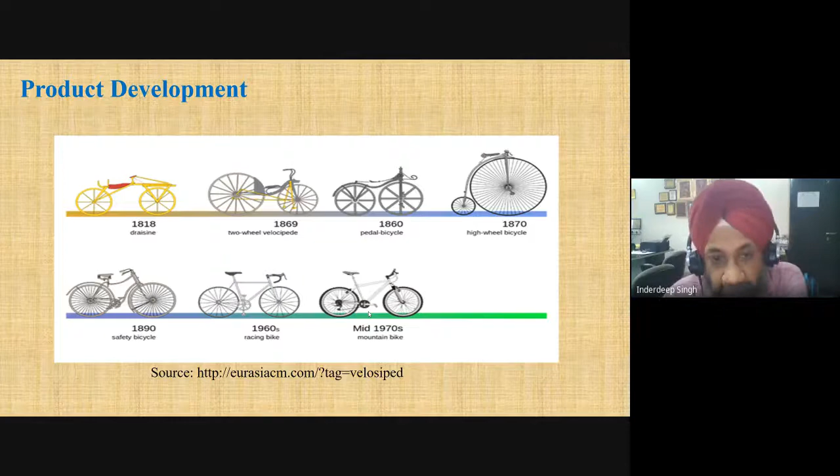This emphasizes the point that if you want to be a designer, you can never stop. There is no product which we can call the final design. Always there is scope for improvement - scope to increase safety aspects, improve functional aspects, increase reliability. There are different aspects on which the proposed design and current design can be compared.

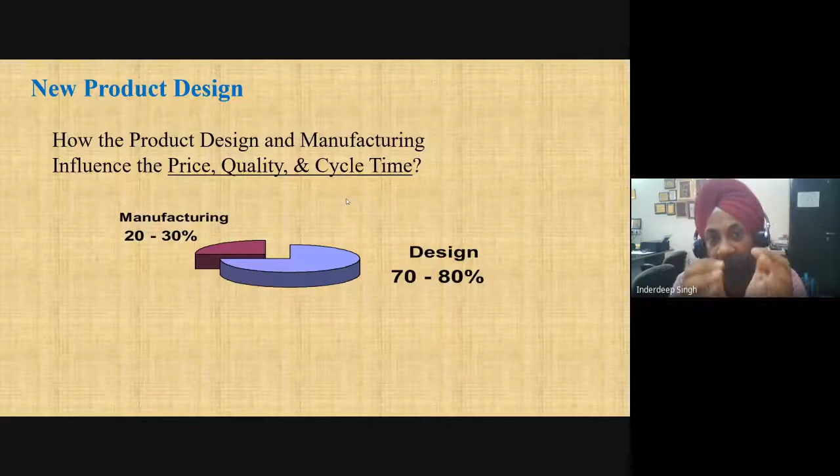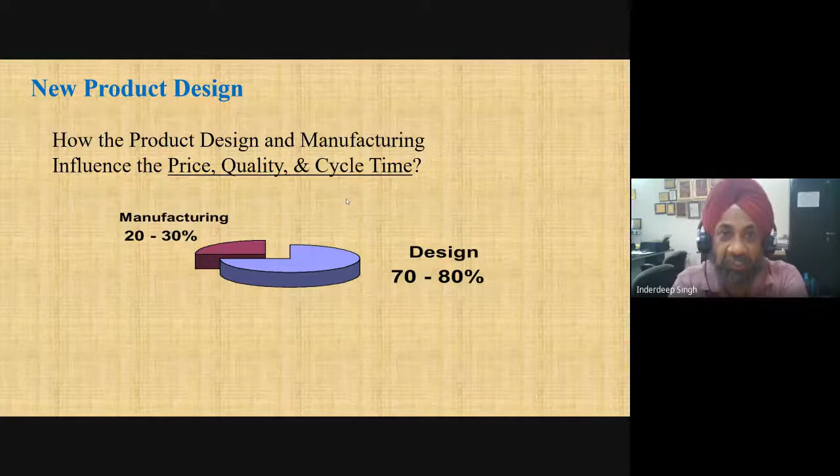This semester I am taking a course on design for manufacturability. In this course, we design the product keeping all the manufacturing constraints or guidelines in mind, so that when the product goes into manufacturing, all factors affecting manufacturing have been taken care of during the design stage itself. This makes manufacturing easier, and easier to produce that product.

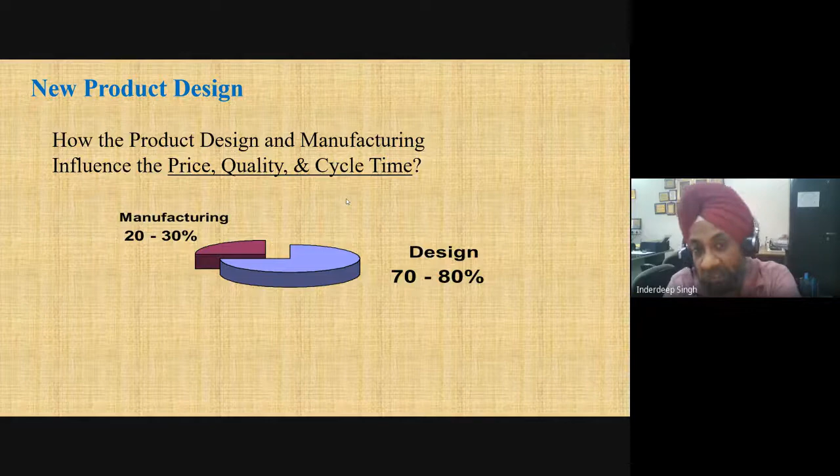Manufacturing can only control 20 to 30% of the cost of the product, whereas 70 to 80% of the cost, quality and cycle time is locked during the design stage itself. Therefore design becomes an important part of any product development project.

Now coming on to value engineering. Since my topic is product design using value engineering, I've touched on product design in about 10 to 15 minutes. Now for another 40-45 minutes I will talk about value engineering, and finally we will have a question and answer session - I am not very sure whether I will be able to answer, but at least we will have a question round.

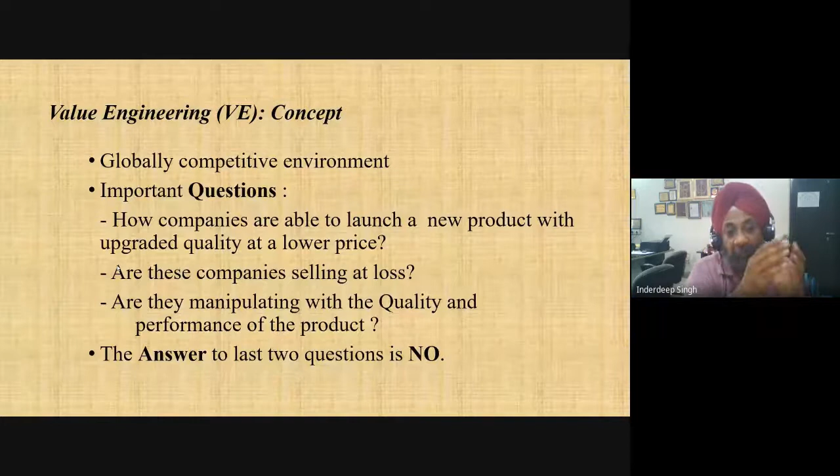So for the products which we normally use, suppose I am using headphones - there are a number of headphone companies which may be producing them. So which one I will buy will depend upon the quality, performance, reliability, cost. There will be different parameters of value which will help me make this decision. Globally there is a very competitive environment. So once we are designing a product, we have to see whether it will be able to meet or exceed the requirements of the customer, as well as exceed the competition already existing, or the products already being used by the customers.

So what are the important questions we have to answer to understand the concept of value engineering? First question: how are companies able to launch a new product with upgraded quality at a lower price? If you see, especially in the electronics segment, companies are coming up with new products - the quality is better, the performance is better, the life is better, the reliability is more, but still the price is normally the same or it may be low. Are these companies selling at a loss? No company will make a product and start selling it at a loss. So are they manipulating with the quality or performance of the product?

They may not be manipulating with the quality. So the answer to the question - are these companies selling at a loss? The answer is no. Are they manipulating with the quality and performance of the product? Again, the answer is no. So without manipulating the quality or performance of the product, and still making some profit, how can companies come up with new products? That is the basic concept of value engineering.

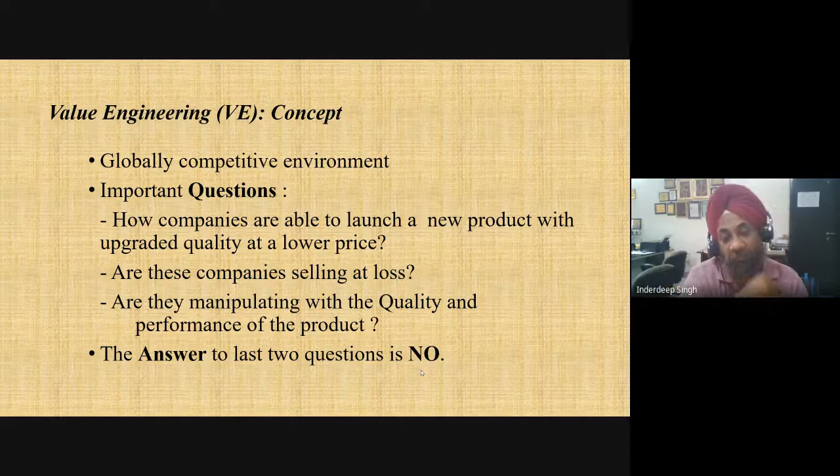That led to the development of this branch - why is it not possible that we come up with alternate materials, alternate processes, alternate designs of the product, so that we are able to provide the desired function for which the product has to be designed, at a reliable design and a lower cost.

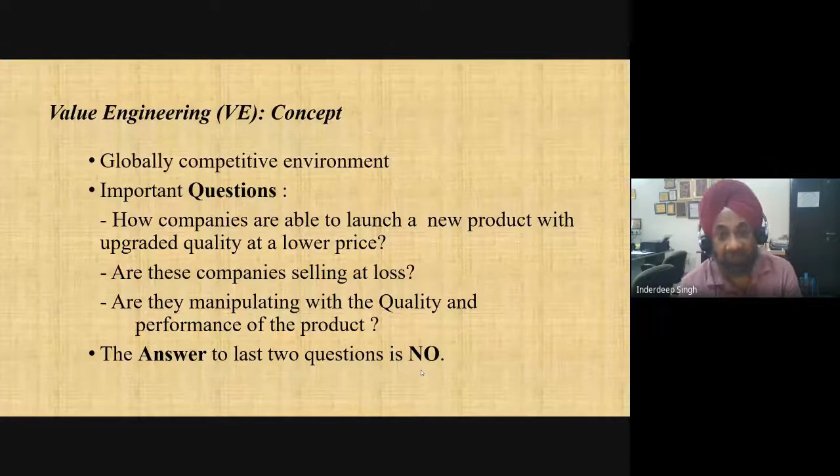So the reliability of the product, performance of the product, quality of the product, maintenance of the product is not compromised, but still you are able to develop the product at a minimum cost. With that concept, this value engineering concept was developed.

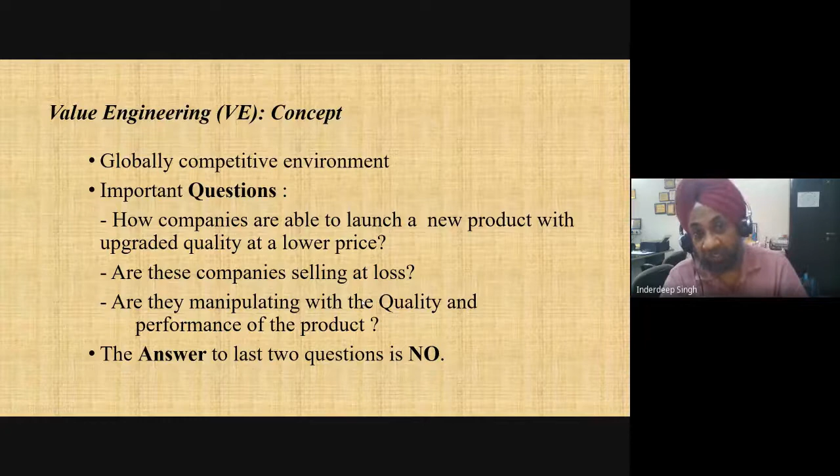So companies are not selling at a loss, they are not compromising with quality and performance of the product, but still they are able to launch a new product at a lower price. Why? Because they are working on alternate materials, alternate processes, and alternate designs of the product. So this is the basic summary.

In 1947, the Vice President of General Electric, Harry Erlicker, observed the occurrence of an unusual phenomenon. This unusual phenomenon, which I have already explained, had been appearing throughout the industry, and it led to the development of value engineering.

That unusual phenomenon was a new thought process related to change in materials, change in process, change in design, and then coming up with a better design - one that is light in weight, better in terms of maintenance, better in terms of comfort, safe, and giving you the desired function without compromising on the quality of performance.

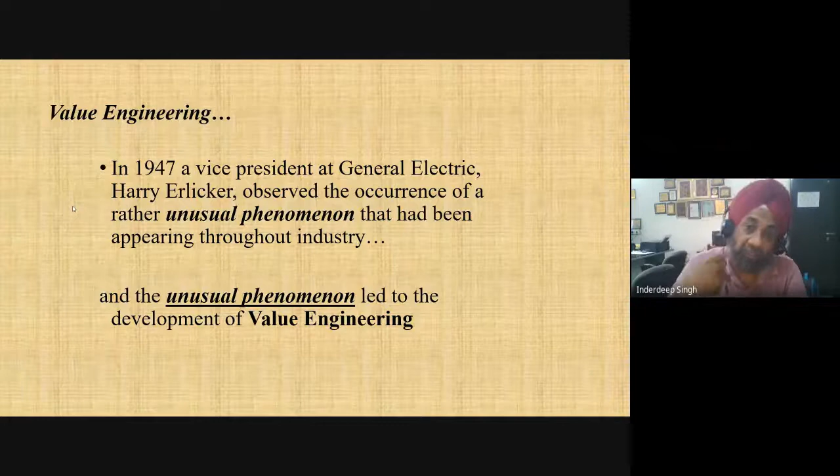So why can't every product be redesigned by thinking in these terms - what can be the other method of doing the same work, if this product is not available with me? For example, I am using this computer mouse. If the mouse is not available, I don't want to use the mouse - what can be the other product which can help me achieve the same function which I am achieving with this mouse?

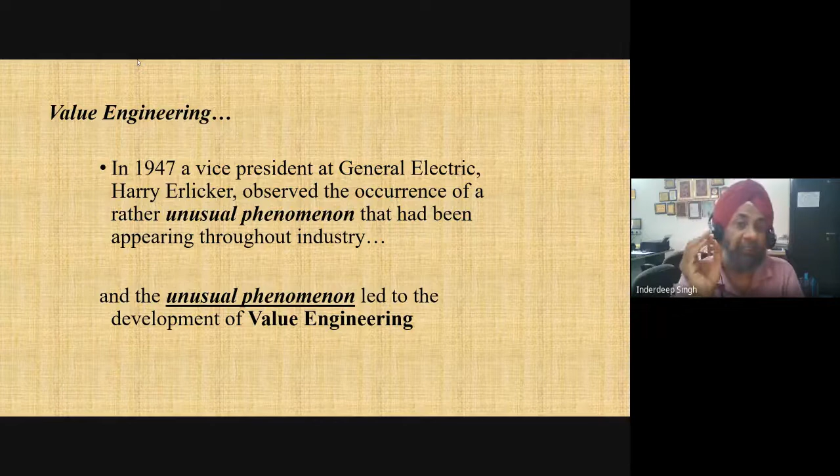That led to a completely new thought process, of how products have to be analyzed keeping in mind the term value. Now, how is value defined? We will see in the subsequent slide. Value is use versus esteem value.

Now the use value for this computer mouse, or this bottle which is now empty - maybe it is a sanitizer bottle - the use value is that it must be able to dispense the sanitizer as and when required without any problem. But the esteem function is how it looks, what is the shape, what is the color of this bottle, can the pump be given a different shape or a different color. That is the esteem value.

So normally every product will have a use value as well as an esteem value, and as a product designer I will have to take a decision on how much of the use value must be there in the product and how much of esteem value may be there in the product.

For example, the tie clip example is shown on your slide. The tie clip holds the tie and keeps it out of soup - if you are having your soup, the tie clip will hold the tie in place and not allow it to go inside the soup. You may buy a tie clip for rupees 10, or even rupees 10,000, or for that matter rupees 100,000, because you may have a diamond-studded tie clip. The diamond-studded tie clip may be very costly, but the use function is being achieved by the 10 rupee tie clip also and the 10,000 rupee tie clip also.

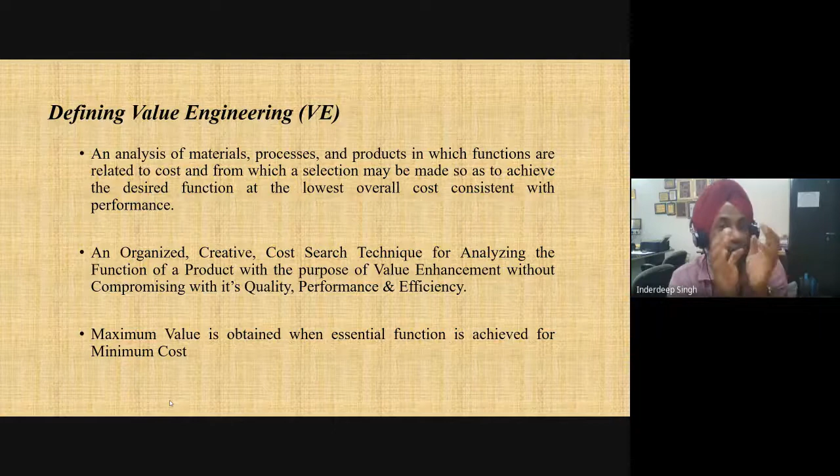An important point to note - I know those listening carefully, n number of questions may be crossing their mind. For example, the wristwatch. There are n number of companies manufacturing wristwatches. Now you may get a wristwatch for rupees 150 or 200, or you may buy a wristwatch running into lakhs of rupees. For both, the desired function is to show time. So the desired function is met reliably by a 150 rupees watch also.

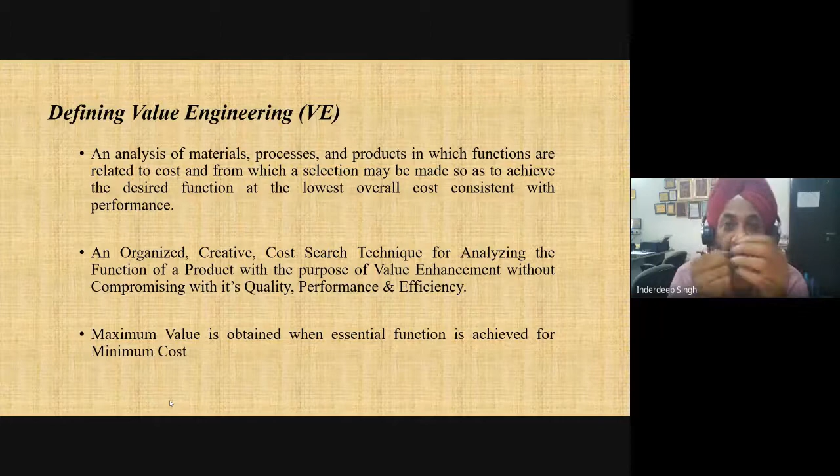Reliably is very important. It must not happen that you want to buy a watch to use for 3 years and it only shows you the time for 3 months, and after that there is a problem - technically you have to take it again to a shopkeeper and then maybe he will try to see how to repair it.

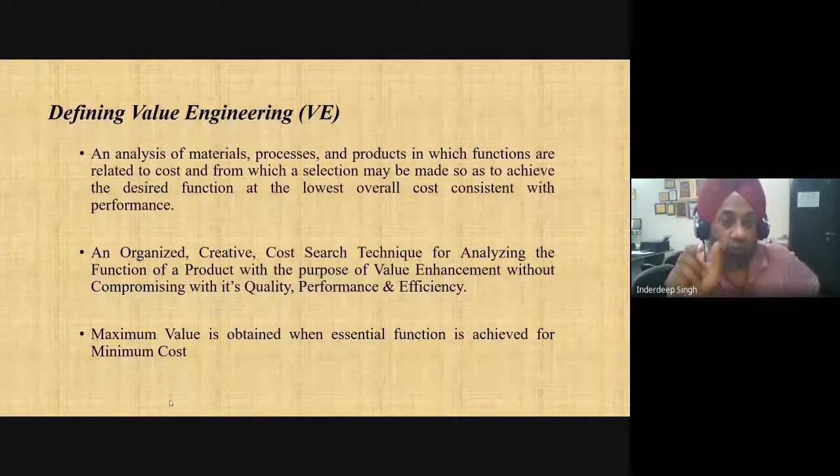So it is not performing the desired function reliably. So what does that mean? That means maximum value is obtained when the essential function, to show time, is achieved for the minimum cost. So if your specifications are that for 3 years this product should deliver, that should not be compromised. For that 3 year lock-in period, you will compare 4 or 5 different products, and whichever gives you the essential function at the minimum cost without compromising quality, performance or reliability, that product you are going to choose as per the cardinal or basic principle of value engineering.

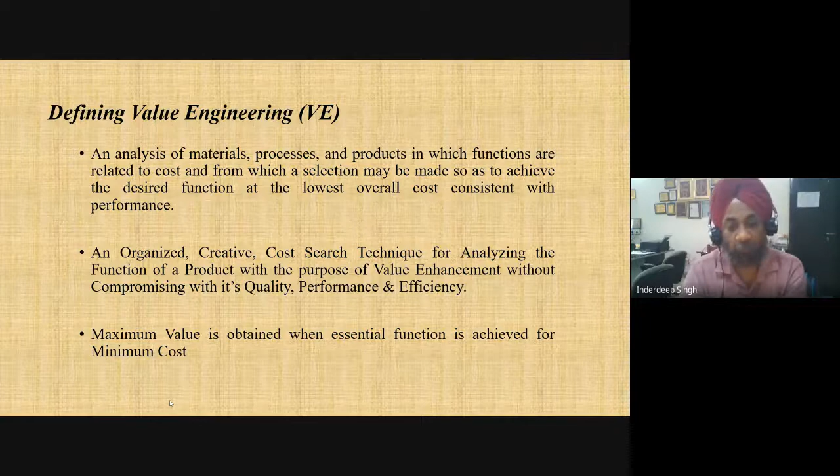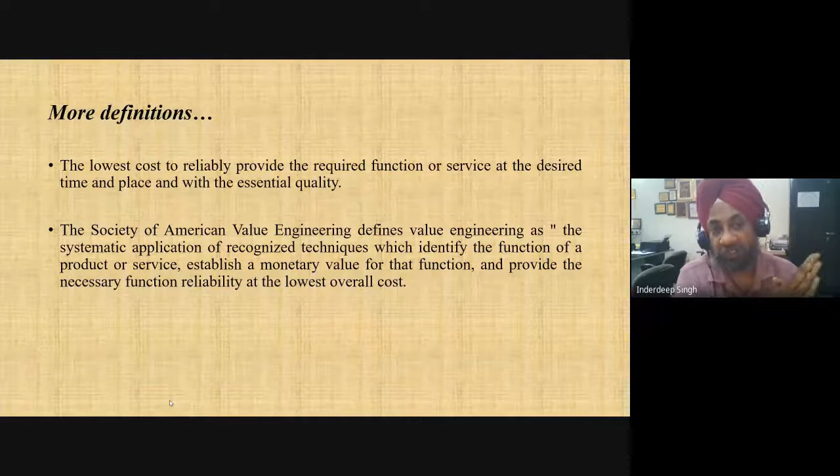There are other definitions also, so I will read and try to explain another one. The Society of American Value Engineers, normally called SAVE, defines value engineering as the systematic application of recognized techniques which identify the function of a product or service. So again the word function is coming, and therefore I spent some time explaining the word function.

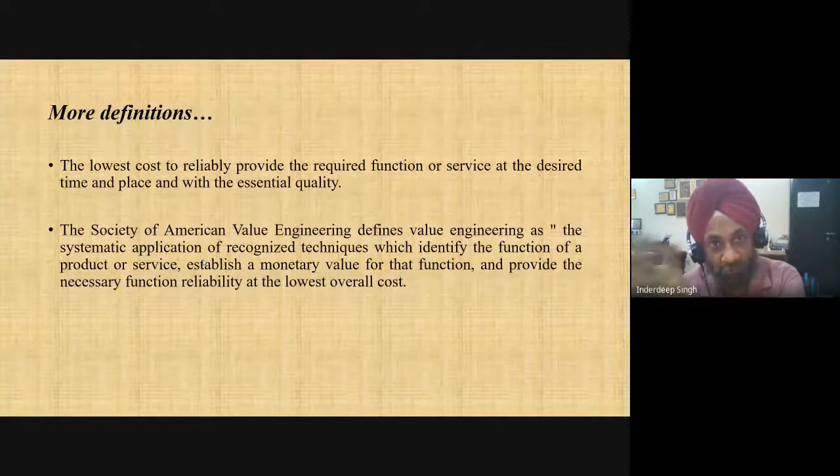So these are a systematic approach. It is not a philosophy, it is a systematic technique where scientifically there are templates available. If you buy a good book on value engineering, towards the end you will get a template that shows how to record the information step by step, and how to solve the problem. So it's the systematic application of recognized techniques.

There are 20 techniques of value engineering. Some of them are behavioral in aspect, some are technical, some are financial. So there are 20 different techniques of value engineering which help you solve any problem, keeping in mind the principles of value engineering.

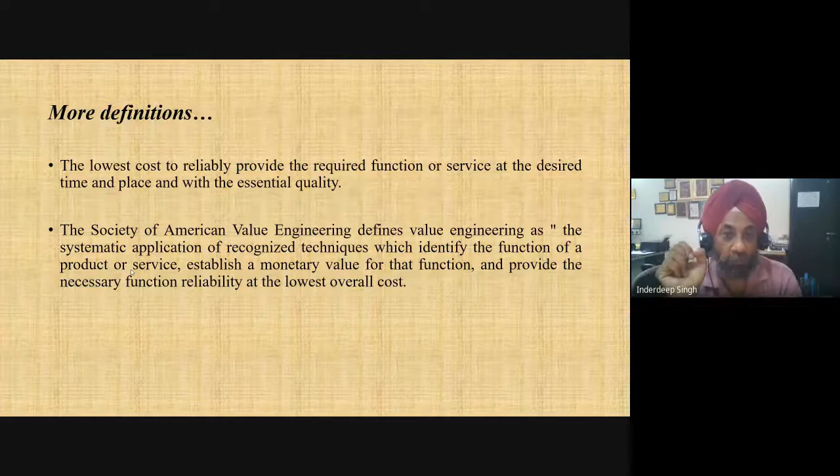So value engineering is the systematic application of recognized techniques which identify the function of a product. How will you identify the function of a product? By asking questions like how and why, and establish a monetary value for that function. So for example, for a watch, which is only for showing the time, a monetary value will be assigned to this function.

What is the monetary value associated with this? What is the minimum money a customer must spend in order to get this function of a watch on his hand or on his wrist?

Which identify the function of a product or service, establish a monetary value for that function, and then try to provide that necessary function. A very important word in the definition is 'reliably' - not reliability, reliably - at the lowest overall cost. So the desired function has to be provided reliably at the lowest possible cost after you subject the product design to the value engineering principles.

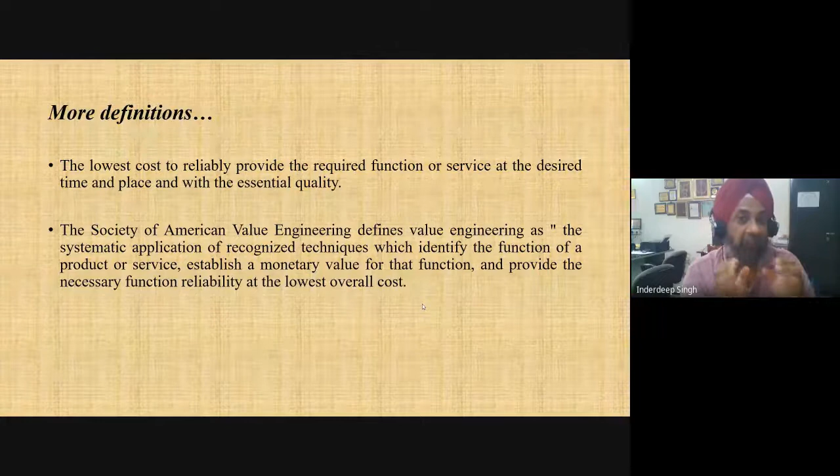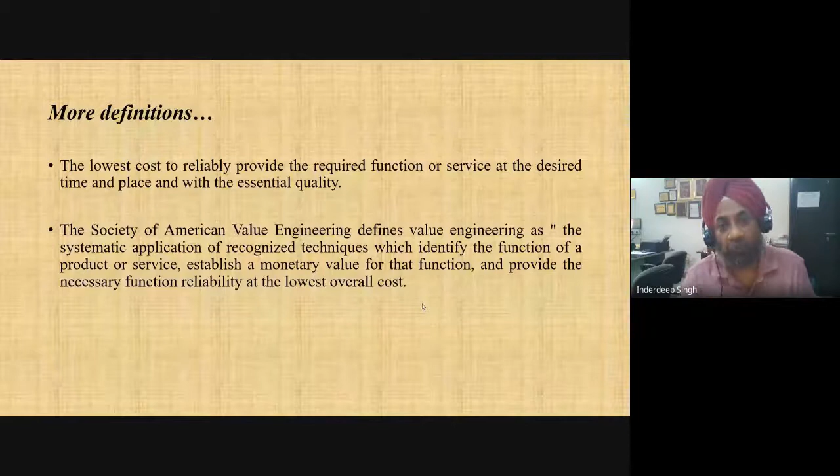So from a value engineering point of view, a designer will try to achieve the target that the product has been designed to satisfy this particular function, and this function must be provided to the customer reliably but at the minimum possible cost. Now let us take an example of a hypothetical bolt.

Normally in class I ask this question to students and ask them to think over it for some time. This is an example of a hypothetical bolt that holds the wing on a transport airplane. Suppose there are hundreds of rivets fixing the wing to the main body of the plane, but we imagine there is one bolt fixing the wing of the aircraft to the main body.

Now the question is, suppose this airplane is carrying passengers and the bolt fails midway in the air. What is the value of this bolt? You can think over it. We have seen the basic definition of value engineering. We know what is value, what is function, what is cost.

Now suppose the bolt fails mid-air. What is the value of the bolt? Many of us will answer that the value of the bolt will be equal to the lives of the passengers that will be lost, but that is not the right answer. From the basic definition of value engineering, we have to understand the desired function of the bolt - to hold the wing to the main body, or to assemble the wing to the main body.

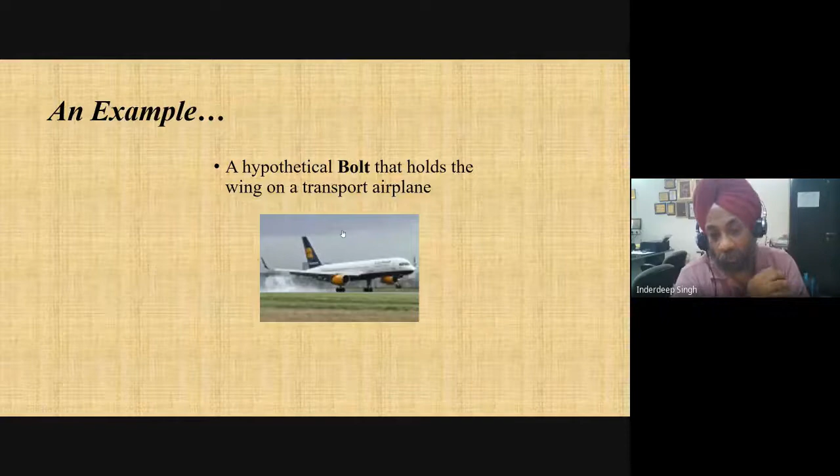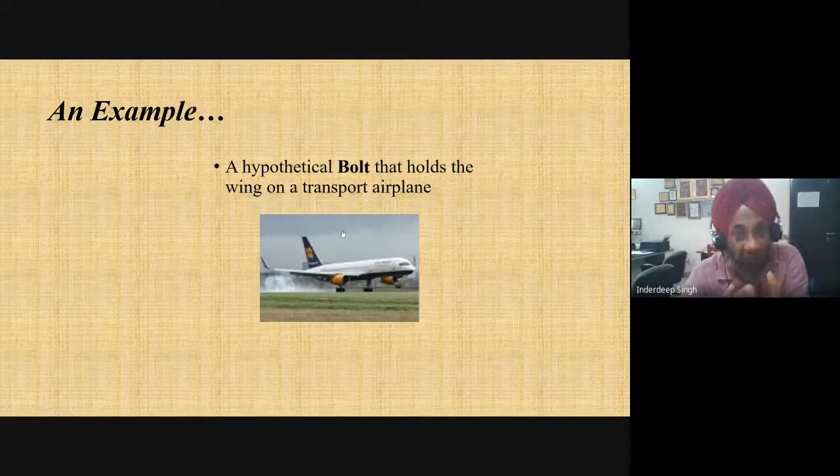But finally, I will buy whichever one is satisfying my requirement in terms of color, size, smell, whatever I want to judge, but at a minimum possible cost. So that is the basic concept we must apply in all designs that we normally do. So in value engineering, if applied to the product design, the design that we come out with will definitely be cost efficient. So the cost has already been integrated into the product design.

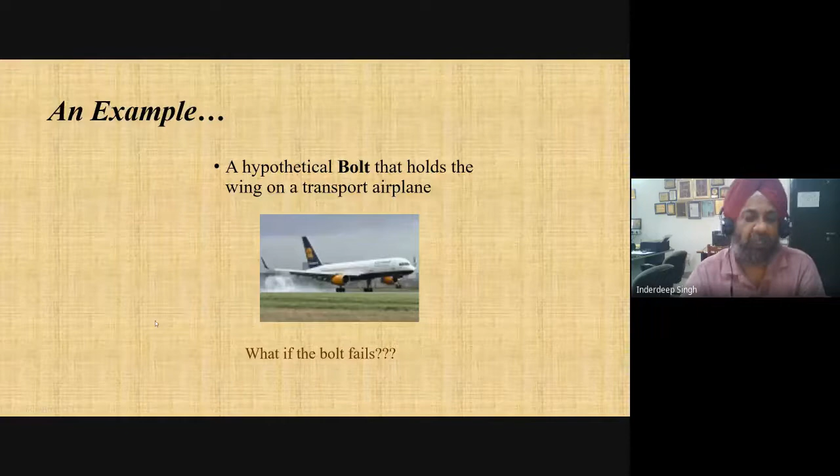Now this is the question which I have already asked you on the screen: what if the bolt fails? The answer is that the bolt has a zero value if it fails.

These type of projectors are not used these days, but still we can see that if we analyze the product by breaking it down, normally one of the techniques of value engineering is blast, create and refine. Blast means if it's a bigger product, you bring it down into its different parts and components which have been assembled together to make the larger or complete product. So you break down, blast it into individual components.

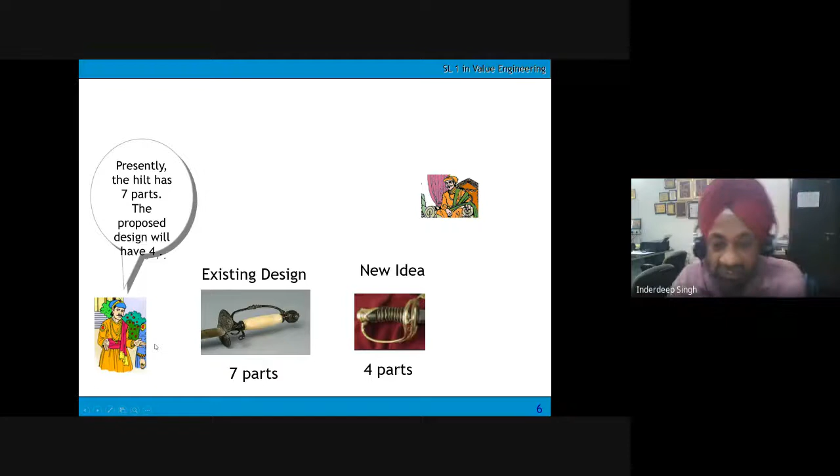This is the new idea. So maybe you may not be able to appreciate the reduction in the number of parts, but at least we can appreciate the idea that one of the... just a minute.

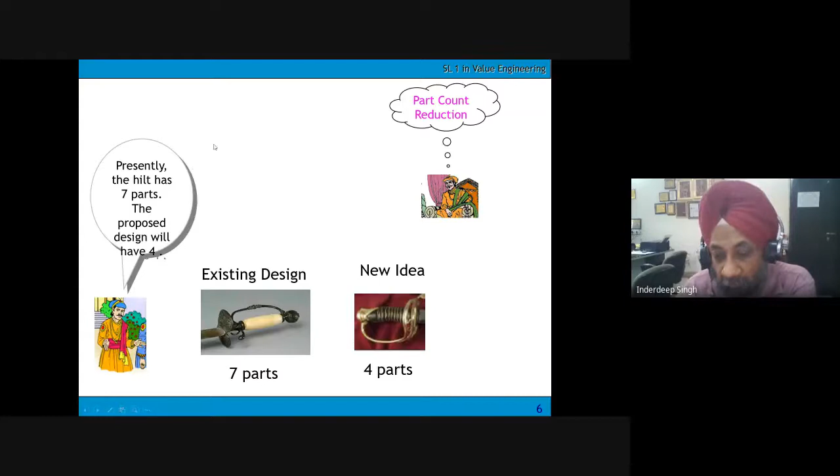I go back again, there was a phone call, so I'm sorry. So the ideas are: first idea, change in the design of the hilt, which means we should reduce the number of parts going into the product. Second idea is that we should not use specialized design. We should go for a simpler design which is already manufactured.

So what is this idea? This idea is part commonization, also called standardization. So whenever we are designing a product, one of the key elements can be to always focus on standard parts and equipment at standard dimensions which are easily available.

Now some of you may be wondering, is it really required for the new soldiers, how will they attain mastery of using a sword without this? So therefore it is already explained here that these new swords can be given to the experienced soldiers who do not require this hilt because they are already skillful enough to use this kind of sword.

So what does this idea mean? This idea means benchmarking. Why? Because this idea has been taken from the sword that was used by the Shah of Persia.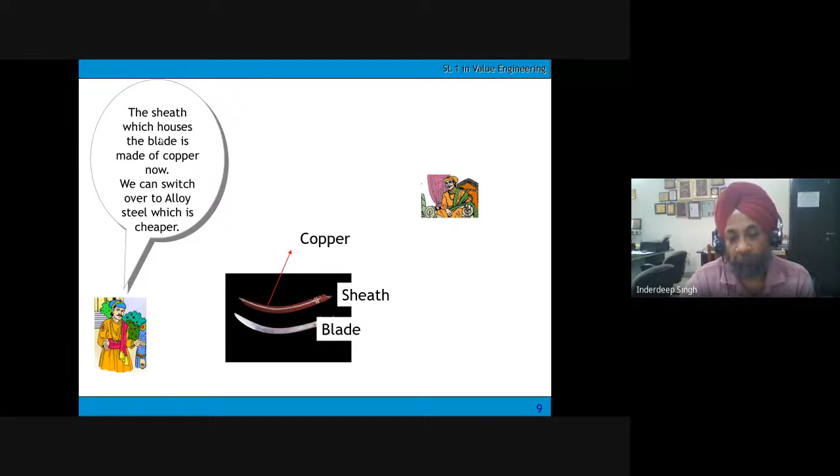The next idea is related to the sheath. Sheath means the covering of the sword, you keep your sword in the sheath. The sheath which houses the blade is made up of copper now; we can switch over to alloy steel, which is cheaper. So the sheath made of copper will definitely add cost because copper is costlier than steel. So you can switch to steel, which is a good idea about alternate material.

What is the next idea?

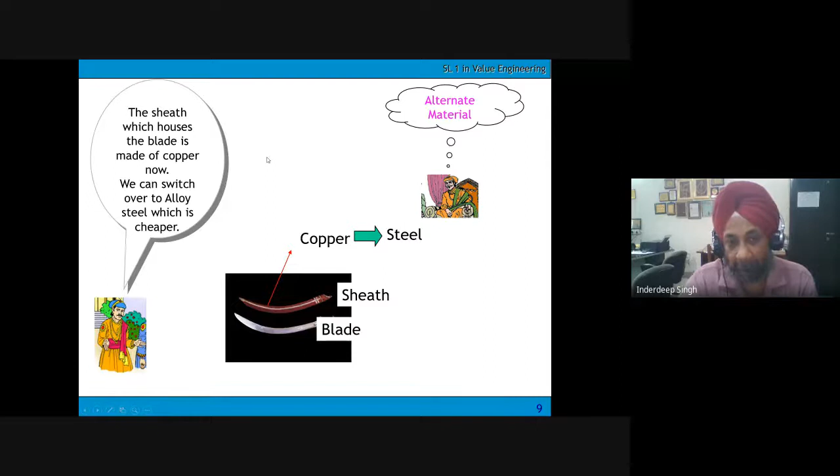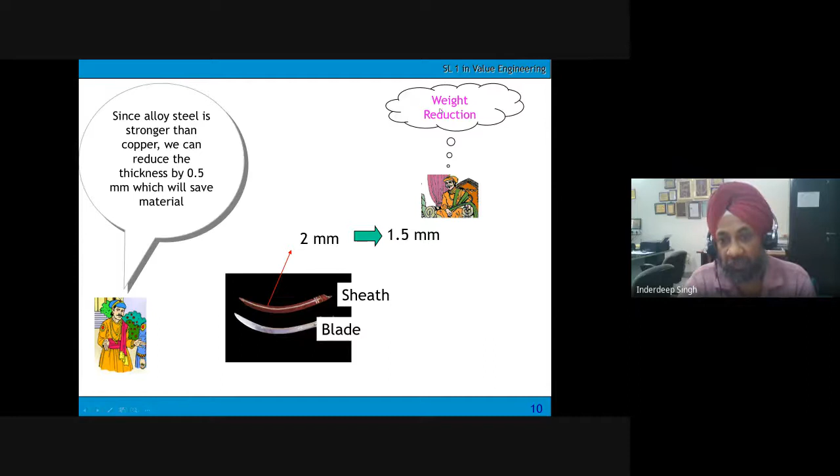The next idea is, since alloy steel is stronger than copper, we can reduce the thickness by 0.5 millimeter, which will save the material. You can see this change in the sheath. This is 2 millimeter, and the blade is 2 millimeter thick, we can change it to 1.5 millimeter here. So that will add to the reduction in weight.

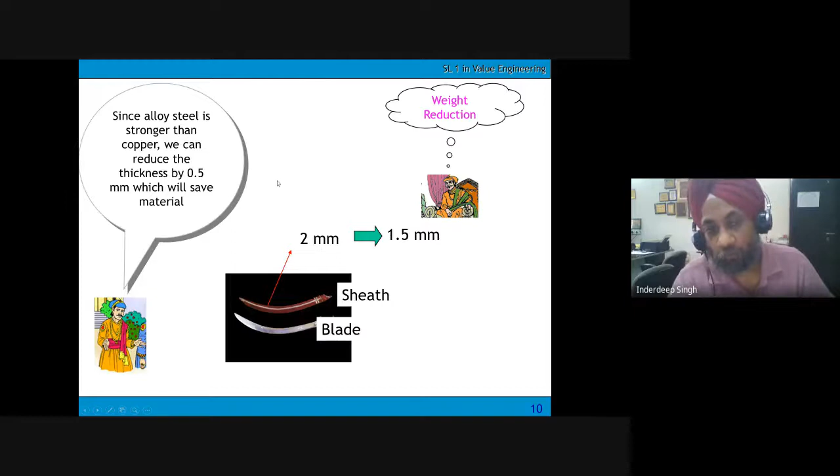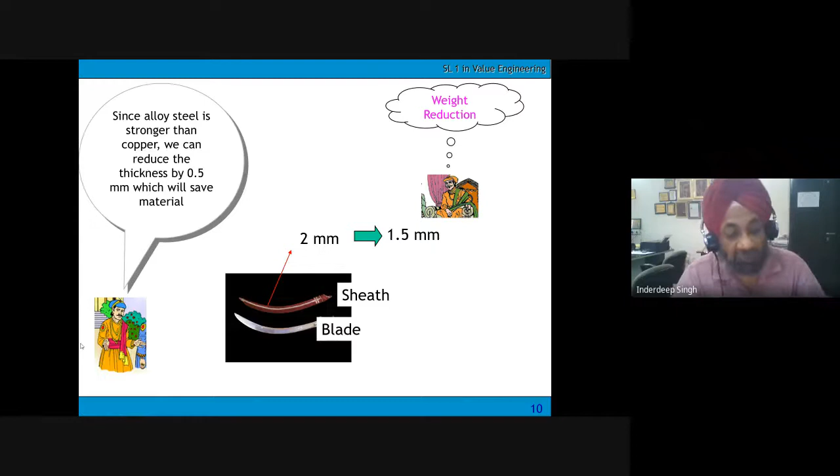The sheath is now made up of steel, which is stronger than copper, so the thickness can be reduced without compromising. It is stronger, therefore with less thickness we may be able to get the same strength. So there is no compromise on the performance or quality of the product, but we are still able to save the weight of the product, and reduce the cost of the product as well.

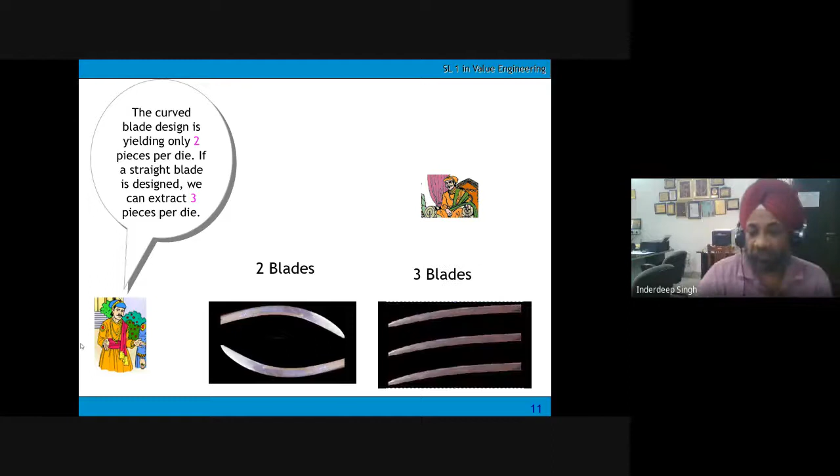What is the next idea? The curved blade design is yielding only 2 pieces per die. If a straight blade design is used, we can extract 3 pieces per die. So you can see, this is 2 blades, these are 3 blades. By changing this curvature, we can get more yield. So this is yield improvement.

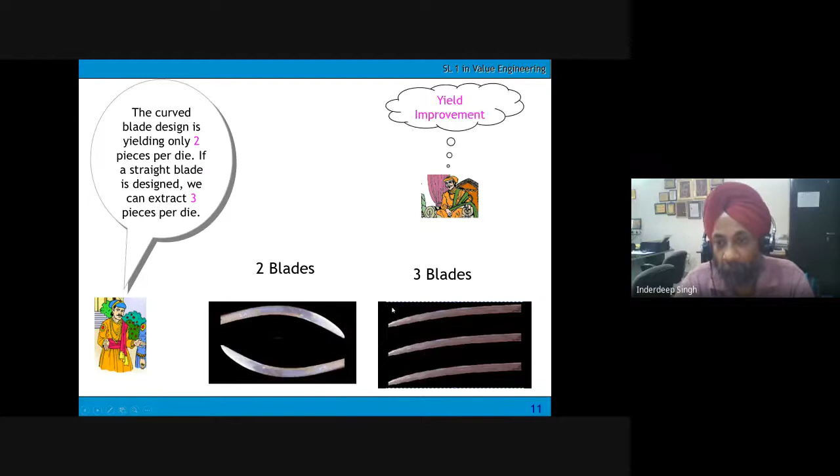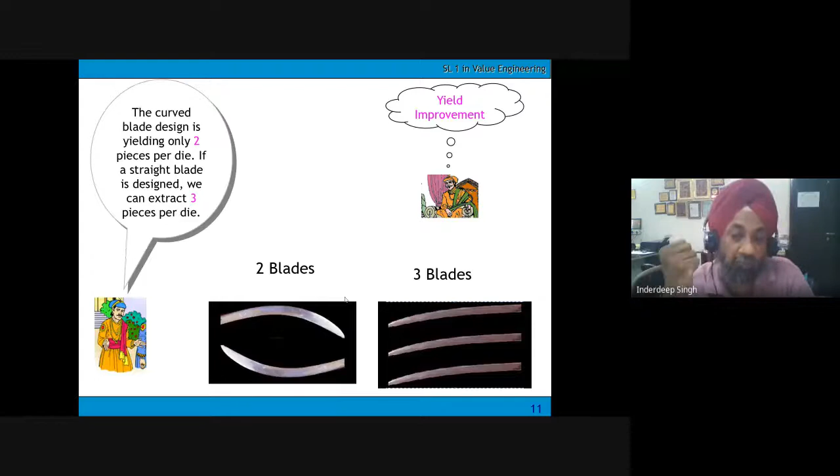The authors who developed this PPT, available on the internet, have been able to highlight all the important points which must be kept in mind from the product designer's point of view. We normally think about which material must be used for making a product, which process must be used. We must always look for alternate materials, alternate processes, standard parts, and benchmarking.

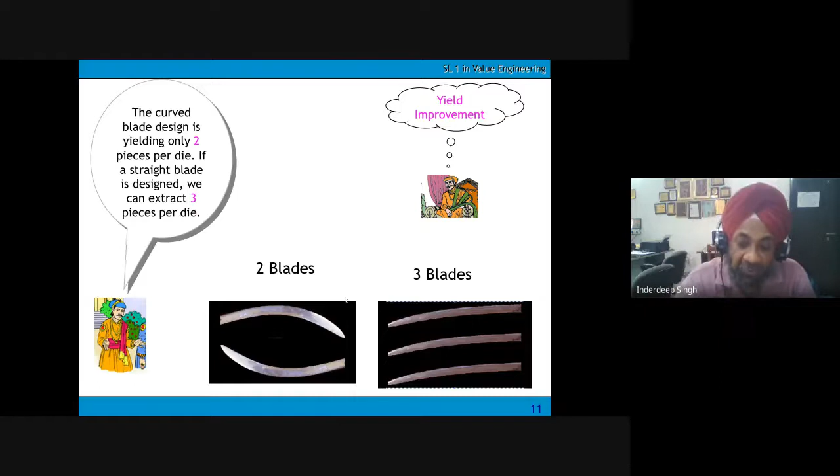So all important product design thoughts are integrated into this single case study, but still there are challenges in terms of change management. Although it is proved that it can help save a lot of money, there are still challenges related to change. There is another minister in the court who says the present design has been used since the time of your grandfather without any failure, so we should not risk any design change.